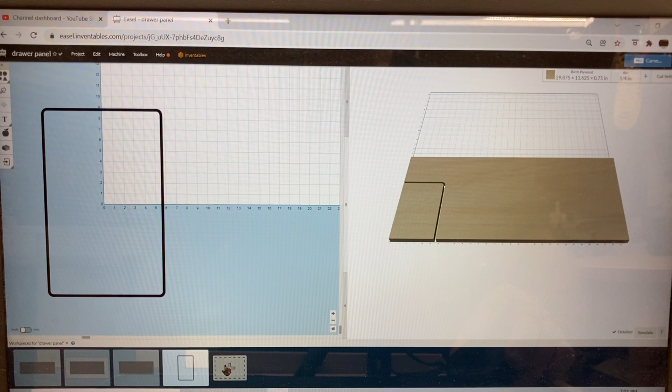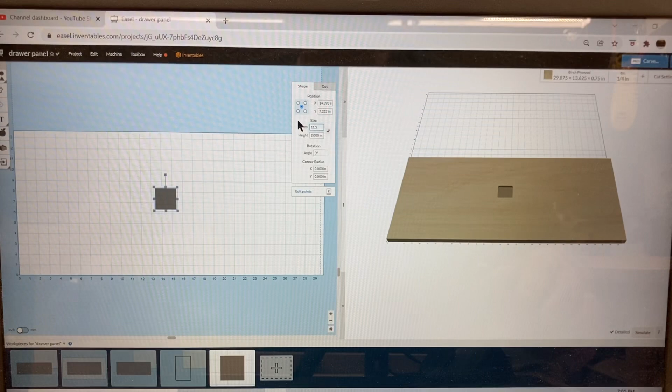The next question is, how did I design this? So let me show you real quick. I'm just going to open up a brand new window, and I'm going to come up to the Shapes menu and select a rectangle. Let me just bring it up here in the center of the area where you can see it. And I need to be able to set on the X-axis. I'm going to set this at my 11.5. And on the Y-axis, it's going to be 17.88 inches.

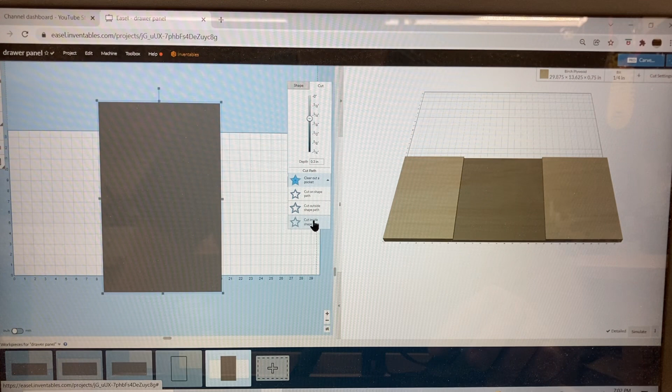I want to go ahead and change my cut and cut this on the inside. I do not want this to be a pocket. I want to cut it on the inside. And I want to make sure that I have the bit set for the 1/4 inch. Now, right now, these corners are 90 degrees, and I want to be able to make the shape, and I want to be able to have the radius. Now, I said this was 9/16 of an inch. If I convert that over to a decimal, that's going to be 0.5625 of an inch. So now I have the radius.

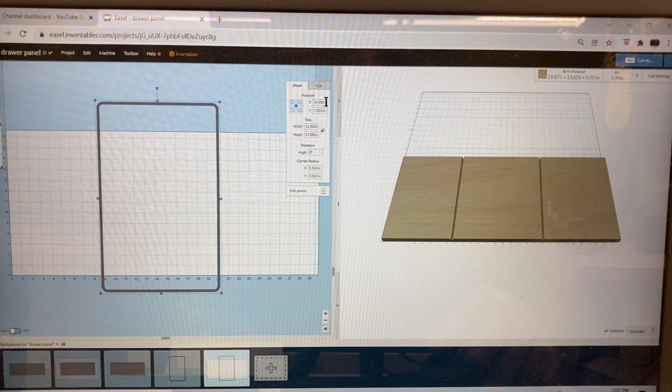Remember, I want to be able to carve this where it's in the center. So all I need to be able to do is have this highlighted at the center and then be able to select 0 on the X and the Y axis, and I am done. That is just how simple that it is. And by sliding that over, I'll slide it up. This is where I'll put the bit to be able to start the carving. And I do want to have this cut all the way through. So I'm going to just go ahead and have this all the way down.

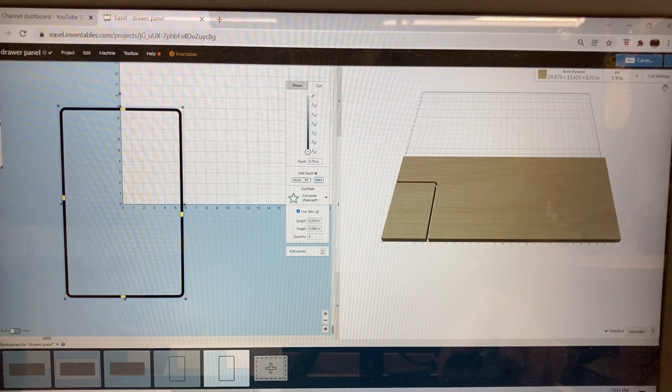I do want the tabs. I can hover over the tab, hold down the left mouse, bring it up over into the center. Same thing with these up here. Hold down the left mouse and slide it over. So that way I'll have 4 tabs on the corners. This will cut all the way through. I don't want to be real aggressive with this. If I come over to the cut settings, I'm going to leave this at 50 inches per minute, and I'm going to go ahead and carve this at about 0.05.

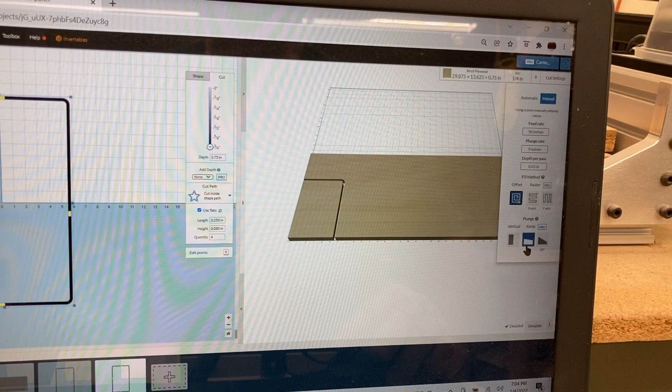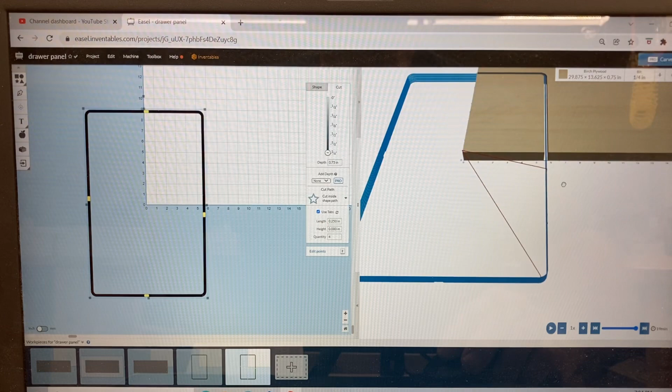I don't need to worry about the raster because we're going to be just cutting the slot. So I can leave that right there. I do want this to be able to ramp in, and that will take care of it. How long is this going to take to be able to carve? It's going to take about 19 minutes, and I'm okay with that. I want this to be slow, and I want this to be very careful at how this carves out. And that's what it's going to look like. It will have multiple passes, and that's okay.

The last thing that I want to double check is the thickness of the material. And when I went and checked the actual thickness of the plywood, it is actually 0.763, not the 0.75 of an inch. So in that case, I want to come back over to the material and I want to change that to 0.77 of an inch. I want to make sure that it does carve all the way through. So that will be taken care of now.

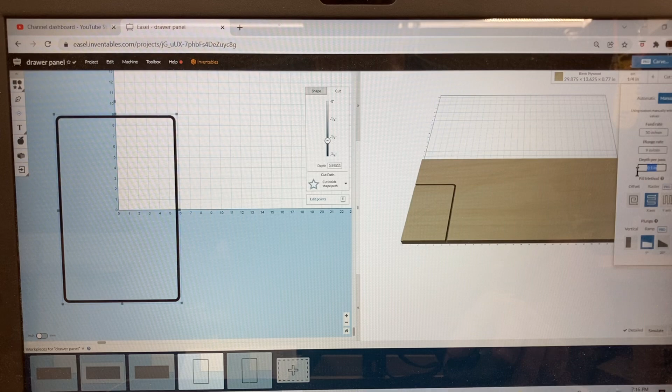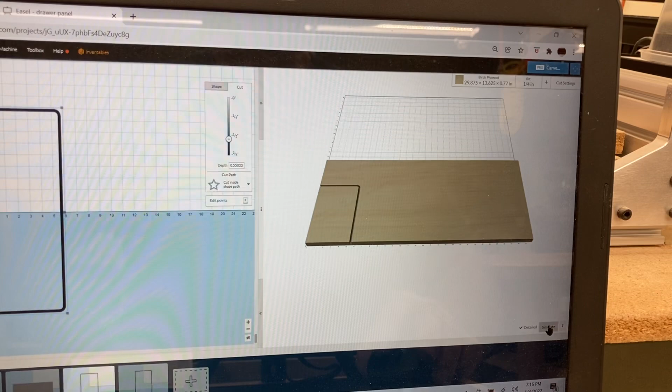So from here, I want to go back over to my cut settings. I want to change the cut settings. I want to cut this at 0.08. So these are the settings, 30 inches per minute. The plunge rate will be 9 inches per minute, and the depth per pass will be at 0.08. Don't need anything here, so I'm just going to have this on the offset, and this will ramp in. So from here, I want to simulate, and this is going to take about 9 minutes to carve out.

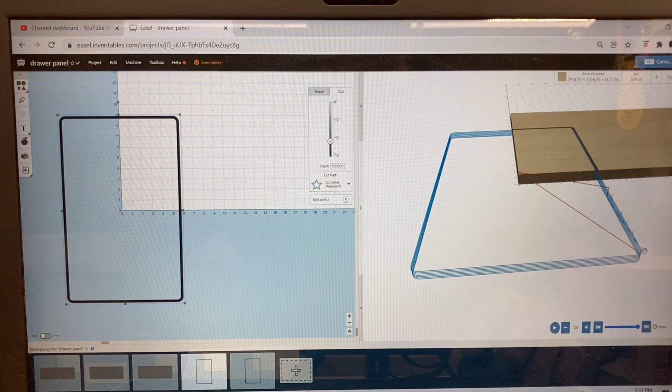And if I look at this up close, you can see the number of passes that it's going to take, and that's actually okay. I don't mind this taking 1, 2, 3, 4, 5, actually 6 passes to go through this material, because I want to have it go slow and do a really good cut.

So now I'm going to bring it back to this XY0 position right in the center. And then I'll change bits to my 1/4 inch bit. This is an excellent opportunity to verify the calibration. That brings me right back to my XY0 position. Change the bit and get this hole cut out. Now you notice I also changed this to millimeters to do all of these tests. I typically use inches to do the carving, but to do measurements like this, I use millimeters quite often.

Now it's time to get this machine carving, but I wanted to take just a moment to talk about the use of millimeters. Anytime that I need really detailed, very specific, and very accurate measurements, I'll switch over and use millimeters, because 1 millimeter is a whole lot easier to work with than a 1/16 of an inch or a 32nd of an inch. Yeah, you get the drill.